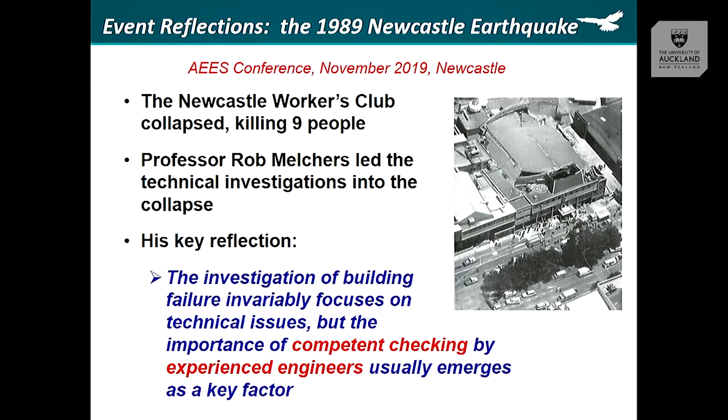2019, where again the design of more than one multi-storey building has been found wanting last year, and some of the issues are actually popping up in other spaces. I wanted to convey a few thoughts on that, without dwelling in any detail on any of those buildings, obviously, but there are some areas of challenge and opportunity I want to run through with you, and we'll phrase them as engineering practice issues in 2020. There's a lot of discussion going on in this space, and I'll just add some thoughts into it.

But the three themes really are all around the designing of ductile structures, and again, what we're seeing is some disconnect between concept and detail.

The common threads from those recent design failures mainly pertain to ductile multi-storey buildings. It's the old chestnut of inter-storey separations either not being provided, with floors being locked up between floors, or the building separation between adjacent buildings where the numbers haven't been done correctly and not enough space is being left.

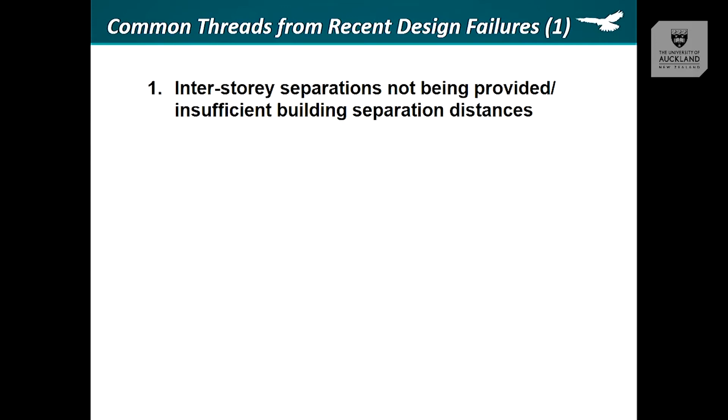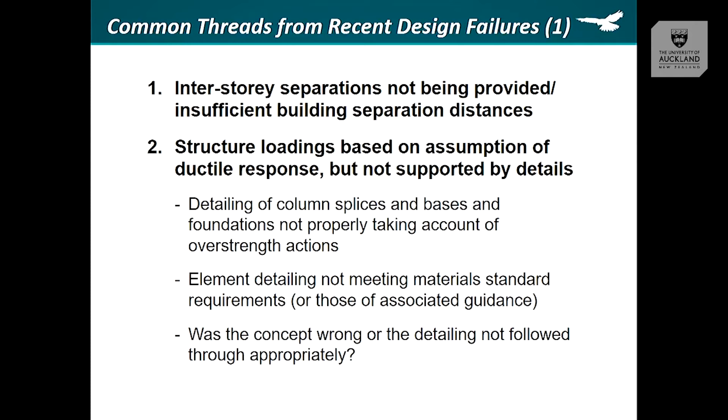The design process starts by assuming a level of ductility to determine the structural loadings, but that's not followed through - the talk is not walked when it comes to the details. That plays out most notably in steel, around column splices and the bases of columns, foundations, not properly taking account of overstrength actions, and the associated element detailing not meeting material standards or relevant guidance. Sometimes the question remains: was the concept wrong, or not sufficiently thought through, or was it the detailing not followed through appropriately?

The third common denominator is that in each of the cases I'm aware of, it was subject to a full PS2 design review. It just didn't spot those shortcomings.

The common consequence of the ones I've been associated with is that the cost to everyone, well beyond the design team, of getting the concept and the detailing - or any combination of those two - wrong, is vast. These were design failures, but they were picked up at various stages of construction, and I think we can all think of one or two in this space.

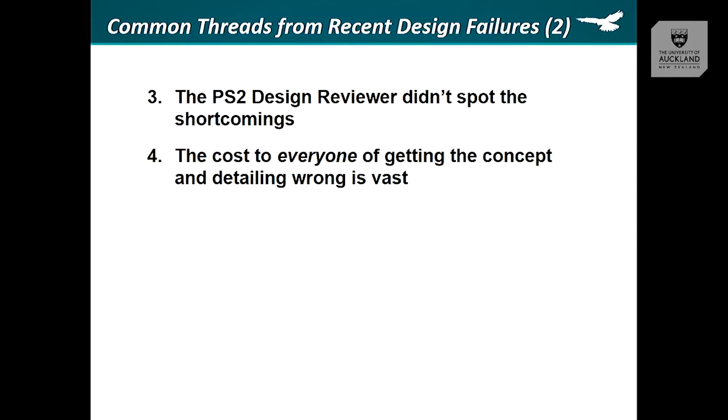Let's jump into the PS2 review process and link that with QA. What we're typically seeing is that PS2 reviews are seen as a compliance element, invariably undertaken upon completion of the design, and they're typically procured on the basis of price. That's a sad bit of reality we're all conscious of.

If that's the process aspect around a PS2 review, then you have the technical aspect - some PS2 reviewers are just not seeing the issues with the load paths or where capacity design requirements are clearly not being met. That's a technical competency issue playing out. Whether that's a consequence of detailed design drawings being so well developed and complex that some PS2 reviewers are not standing far enough back and examining the structure as a raw skeleton, I guess.

So what's the linkage with quality assurance? I was discussing this with Tanya Williams, General Manager of Engineering Leadership at Engineering New Zealand, and she jumped in straight away and said, well, we all know that QA is most effective at the 10% stage - you can debate the number, but QA is most effective at an early stage.

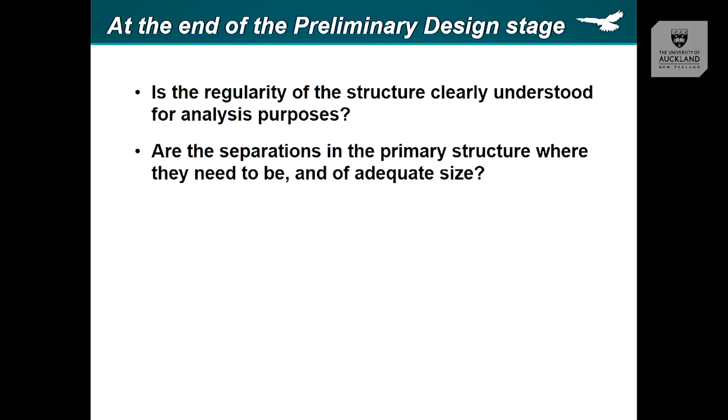As the design develops to the point where the separations in the primary structure are identified, they're where they need to be, and they're appropriately generous proportions, not skimped. Because once you go into the detailed design stage and you haven't got your separations right, it's hard to pull back from that.

Equally, that's the time to ask what are the detailing objectives, what are the detailing requirements, particularly reflecting what's the rationale for deriving the overstrength loads. It varies from material to material and type to type. But the notion is, if you put a box around those three, map those out, state them in a brief version.

It's a requirement in some spaces, such as the Ministry of Education through their various review stages, of the design features report as a preliminary design stage deliverable. I think that could be adopted for any building.

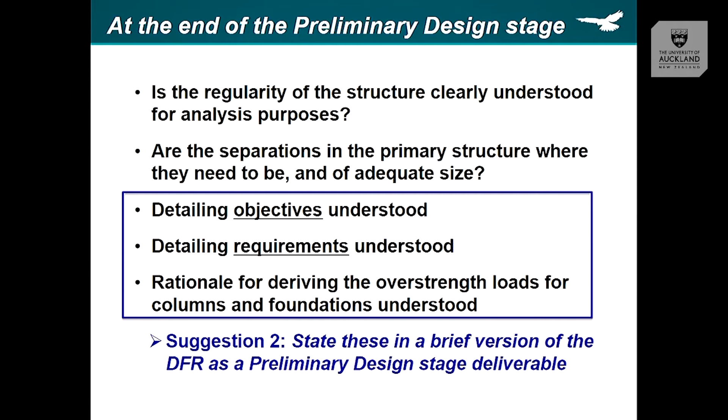So those are the key points I wanted to float, and I just wanted a quick sidebar into seismic assessment, because more buildings are being closed as we speak as a result of low percent NBS ratings. I wanted to share some messaging, really, around making sure engineers are across this, and also try to bring this out in a more public arena, that what does a low percent NBS rating mean, what doesn't it mean?

What it means is, the purpose is to definitely signal heightened risk in the event of earthquake occurrence, and to get the message that some mitigation work is required, sooner rather than later. If the building is then determined to be earthquake prone, there's a formal linkage with defined statutory timeframes, which are not tomorrow - they are, particularly in this neck of the woods, in terms of decades.

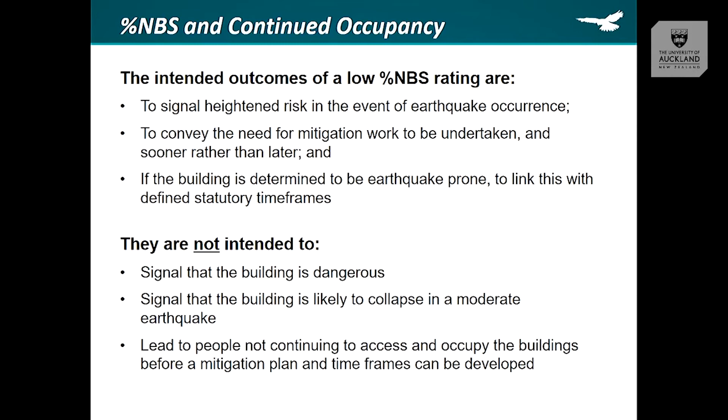They're not intended to signal the building is dangerous. They're not intended to signal the building is likely to collapse in a moderate earthquake. There's still a lot of legacy thinking around that from the previous EPB regime. Most importantly, they're not intended to lead to people not continuing to access and occupy the buildings before a mitigation plan and timeframes can be developed.

And having invoked the notion of decades, if an issue is found with a building such as a precast floor issue, obviously don't wait decades. The owner needs to get on with the mitigation of those items within a year or two. But in the meantime, there's nothing wrong with the building continuing to be occupied.

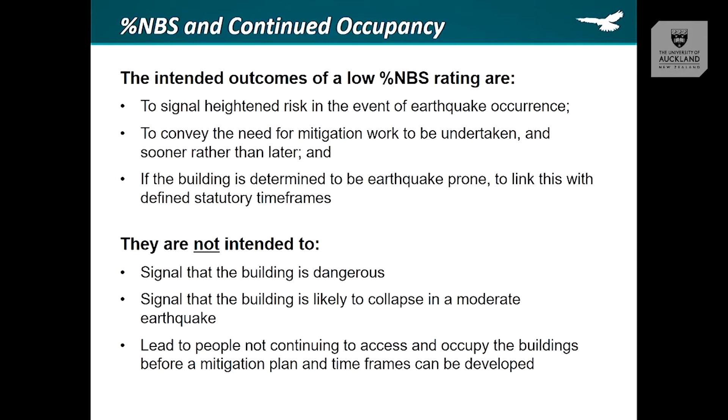We just have to do a better job of conveying this risk concept to people, where they are sadly being driven, we think, by health and safety concerns - let's just say, erroneously.

But just wrapping up, just to reconsolidate the points I'm trying to have a wider discussion on - as we go from the concept or preliminary design level towards detailed design, treat that more as a hold point in project management lingo. It's also a collaboration opportunity.

It's asking the broader question: has anyone else with experience, either from within or outside our practice, had a considered look over our design? Are we clear on the critical design and detailing provisions that must be met in detailed design? And get that early engagement of a PS2 reviewer - it can only be beneficial. They can still have an early engagement and be independent as required from a regulatory perspective.

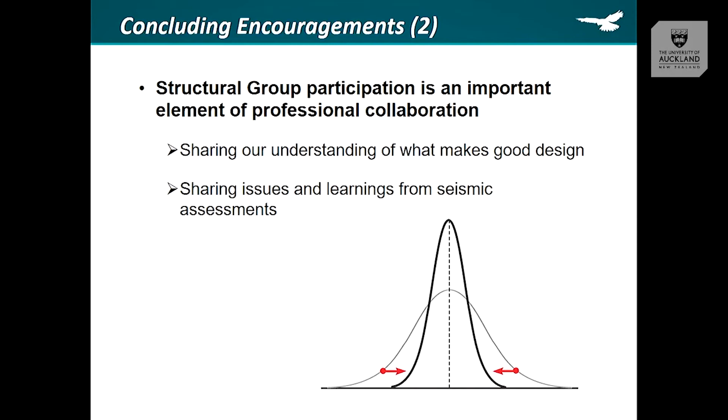Sure, and in Wellington in particular, it's being perceived as a factor in, firstly, whether they will insure, and secondly, how much they'll charge for the cover - and that's our beloved free market, that has to play out. But again, insurance is tough, and it's particularly tough for body corporates and in some of those situations.

It shouldn't cross over into occupancy, but it is being used by sectors that don't appreciate the percent NBS is only a life risk perspective, not a damage perspective - which I think is the point behind your question.

But it goes into the cultural belief that if insurance does not want to cover a building, there must be something wrong with it. Sure, but that doesn't explain why councils that own buildings in some places are closing them upon receipt of a low rating. It doesn't explain why government departments are not occupying them. But it is another factor in the environment.

Are they dead scared about the occupational health, safety and health job? They are, and we've been working with Engineering New Zealand who have spent a good bit of time trying to figure out how we can communicate this better. It's fairly clear that it's the director's risk perspective - the wording in the Health and Safety at Work Act, when it speaks of a risk that can be mitigated with the implication that it should be, a building with a low rating, if you take the director's perspective, you can take the view that we should be mitigating the risk by not occupying the building. We feel there's a disconnect, but it is absolutely in that space.

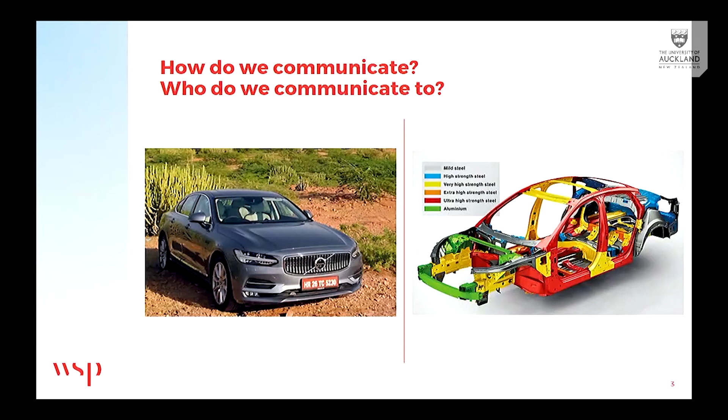So let's just get a little bit real about how we do communicate things. We've made this really bold decision that we want to communicate risk and we want to communicate performance to our clients. So we've got an example here of a car, and we've got quite a cool example here graphically from the car industry. So what do?

We show disasters. We show things falling down. We almost communicate by alarmism. Why can't we stick a fantastic picture up of a great piece of structural engineering and use that to explain performance? Why do we always go back to our failures? Sure, we need to get across to our clients that we are designing for life safety, and there will become a point where perhaps collapse is more than a real probability, it's highly likely. But why do we go straight to henny penny and Chicken Licken and the sky's falling in?

So that was my sort of view of how we might communicate performance to our clients. Let's showcase something seriously cool.

So still on the communication theme, having decided that we do actually want to come out of our shells and communicate to our clients, how do we go about doing it?

We've got all these media. So what we choose to do is we choose to talk about TWAs. So I'm going to tell you a story about TWAs, and this story goes back sort of 20 or so years, well, actually more years than I care to admit, when I was at university. My professor walked in and said, today we're going to talk about TWAs. It's like, great. He got about 15 minutes into this lecture about TWAs, and someone stuck their hand up and said, excuse me, what's a TWA? They got a duster thrown at them, because you could back then. I'm glad you bloody asked. A TWA is a 3-word acronym. Now don't ever sit there like a stunned mullet and not ask a question again.

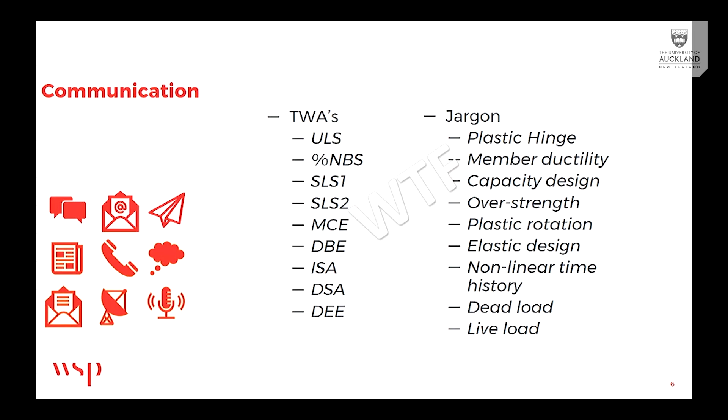So I know this is recorded, I thought very hard about this. I put my own 3-word acronym up. But at the end of the day, we might as well just be talking alphabet soup to people. I'm trying to make light of all this, but this is a serious issue.

How many of our reports are littered with this stuff? You know, those people that do a design features report, thank you. Everyone should be, but thank you for doing it if you are. But when we talk about some of this stuff, how are we actually conveying the message to our clients and knowing that they understand it? How are we conveying this message to other disciplines and getting them to understand it?

So I'll get off my high horse on communication momentarily.

Hands up who's never made a mistake. Great, I thought someone might stick their hand up. So we've accepted mistakes happen. Do we think they happen in our designs? Hell yes. So if we accept that we all make mistakes, and I'd be surprised if that's not a true statement, I've borrowed this first bullet point off somebody.

Is it something that could be a tolerable imperfection, or is it an intolerable error? We've got all these factors in our designs. Is it going to bring the building down? Or is it something going, you probably should have done better, but, you know, think we've got a safety factor, we'll get away with it this time. So how do we think about tolerable versus intolerable?

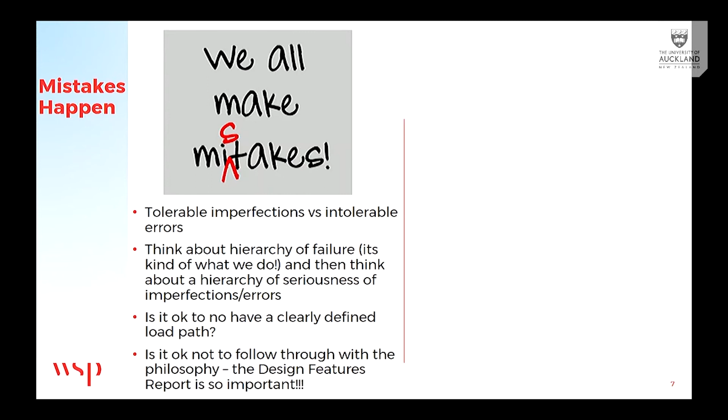Is it okay not to follow through with the design philosophy? Dave's touched on this before. So you've gone to ductility 6, woohoo, because then your SLS 1 is all sweet and everything's pruned to the bone, but you haven't detailed for ductility at all. These things are fairly basic.

It's really, really important, and that's why that design features report that Dave alluded to is so incredibly important. So we've made a mistake. We can learn from it. What do we do? Do we fix it? Do we ignore it? Do we try and justify it with a non-linear time history? Do we defend our answer to the hilt? Or do we act professionally?

I've made some monumental mistakes in my career, and those that I have fallen on my sword over and gone back and fixed, the client might have been grumpy at the time, but that's been a client for life, and they have thanked me for doing it.

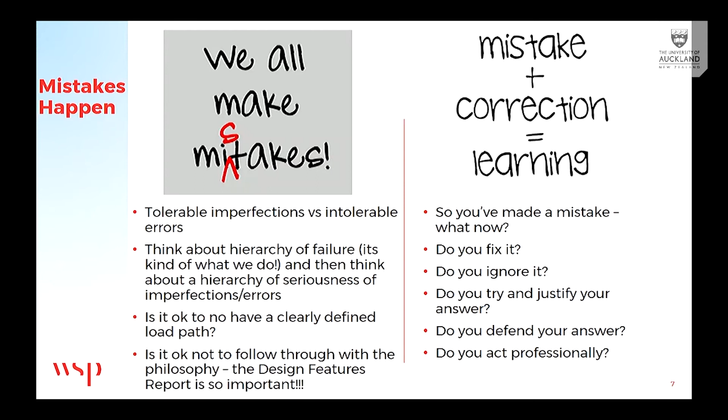How we act is so important. So I'll get on to another little hobby horse of mine: professionalism.

Words like respect, integrity, ethics, honesty, they might spring to mind when we talk about professionalism. They're important words, really important words. I've got a quote here from a David Maister, he's a doctorate at one of the Harvard business schools or something like that.

Professional is not a label you give yourself. It is a description you hope others will apply to you. Have a think about that.

We hold ourselves up as professional engineers. It might be slightly arrogant to say that we are professional and we are honest and got integrity and all the rest of it. We earn that by our behaviours.

So just to cut the quotes out of a dictionary, professional is about conduct, it's character, it's behaviours. And I also like the one when they talk about a profession being a calling that requires specialist knowledge and academic preparation. That's what we do.

So, that gets me on to my next one. Who sets the risk? We had a discussion before about MBS. How many reports have you seen recommending somebody evacuate a building? If you write those reports, please don't. It is not up to us to accept the risk.

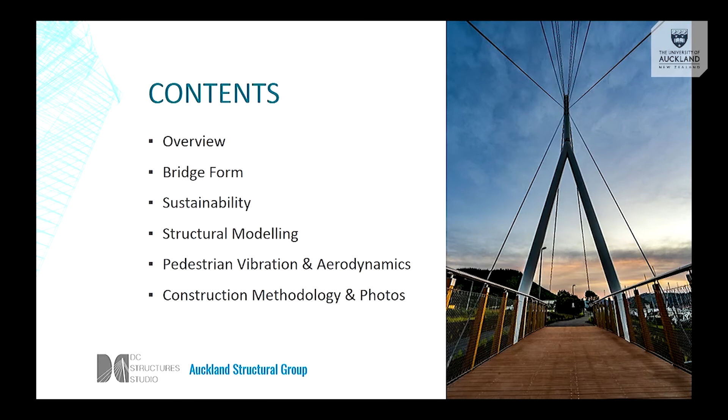Obviously each one of those in themselves is an hour lecture. And then I've got some cool photos at the back that show you start to finish how to build a bridge. So we may zip through some of the core content.

So the Water of Leith Bridge is down in Dunedin, right on the waterfront. If you know Dunedin, you'll know the Forsyth Barr Stadium, or the Otago Stadium — it's right next to that. So it's a coastal environment.

The client was Dunedin City Council. Being a cycleway asset, it was also jointly funded by NZTA. Constructor for the project was Edifice Contracts. Geotech was Geosolve, and DC Structures Studio — we were the bridge architects and bridge engineers. The overall project was a design and construct led by Edifice Contracts.

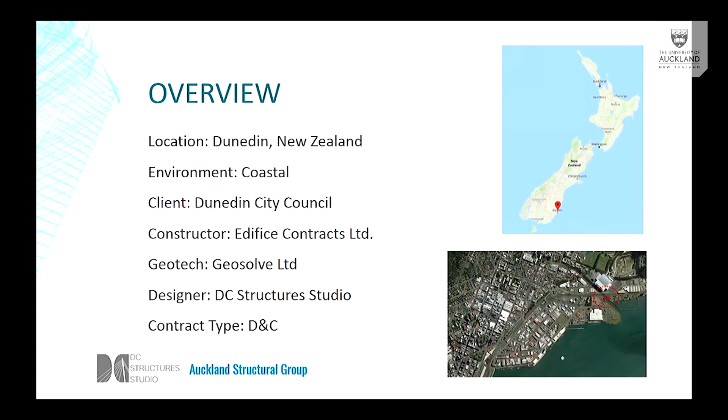So when we came in, the existing design was for a very industrial, mechanical looking truss. It was purely a functional asset. When we were brought in, our goal was to come up with an alternative that would be cost effective. So we developed a cable stay concept, primarily looking at a lightweight structure that was cost effective.

Now obviously this is well beyond what Council had originally envisaged. They were looking purely at an industrial structure down by the waterfront for access. As soon as they saw what we could provide them, discussions turned to further embellishments — architectural lighting was added, we embellished the balustrades, and they got a much higher end product than what they originally set out to do. Again, because we actually massively undercut the budget, which they thought was okay.

But by coming up with the right structural form and being very clever with our material choices, we were able to open the doorway to looking at more of a landmark. So it's a 45 metre by 3.5 metre cable stay cycle bridge, designed to the NZTA Bridge Manual version 3, 5 kPa live load.

The mast is a 22 metre high, what we call inverted Y — so if you imagine a capital Y, it's just upside down with the bridge passing through the legs. That's formed from steel hollow circular sections, all butt welded, so it's a very seamless architectural element in its own right.

We've got 12 sets of strands for the main span and 6 on the back span — they're high-strength spiral strand cable. Being a coastal environment, they've got a Galfan coating, which is 95% zinc and 5% aluminium, just to give it that extra level of durability.

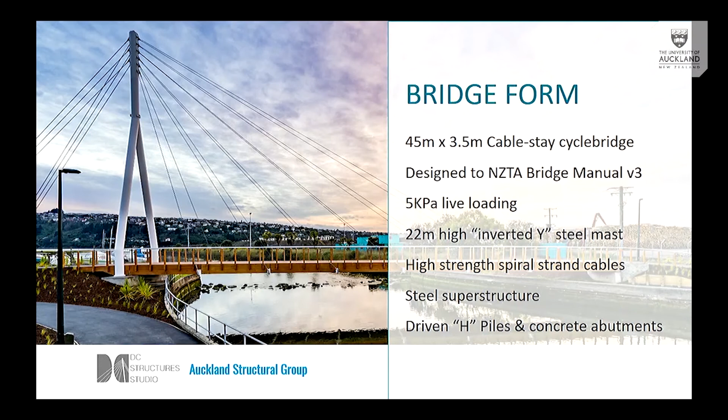That's probably enough on that. Now I want to cover sustainability. I often get asked, how can we as engineers influence sustainability? We've got a bit of responsibility to our clients for coming up with section sizes and materials, and it's in our material choices that we can really make a difference.

So in terms of making this competitive, it was about lightweight structure. Traditionally, a cycle bridge would have either a concrete deck, possibly a steel plate deck with an epoxy coating, or even timber decking. What we've gone with here is actually a product that's 93% recycled—a mixture of recycled bamboo and almost 50% recycled plastic.

I don't know if anyone's been tracking the latest news on plastic. There's a TV program on at the moment called War on Plastic. Plastic is a big issue at the moment—we're chucking away plastic bottles left, right and centre, and it's just being left for 100 years. So trying to get those materials uses beyond their normal life is quite important. We've got a product here that we use, which was 93% recycled.

We teamed that up with glue laminated timber, which again is FSC, Forest Stewardship Council certified. Ultimately, what that says is this is a sustainable material. Both of those materials combined created a lightweight element that meant the steel, the cables, everything was working less hard, which led to the economic driver, which led to a happy client. So all of those things combined well together.

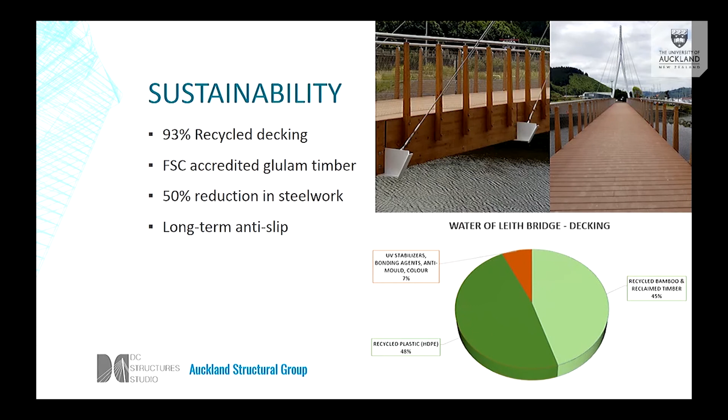We believe, compared to the specimen design, we cut about 50% of the steel out of this bridge. The specimen design was a steel truss with a steel deck and epoxy topping—that was around 50 tons. This structure, with the superstructure and the mast, came in at about 25 tons. So if you're going to take anything away from today, it's think about how your material choices can influence the environment and step beyond just the technical aspects, and think long term.

Okay, let's get into the nitty gritty of the structural stuff. The structure was modeled in SAP 2000—at the time we were running version 20. I know we're pressed for time, so I'll just leave that table up there; you can always come back to this.

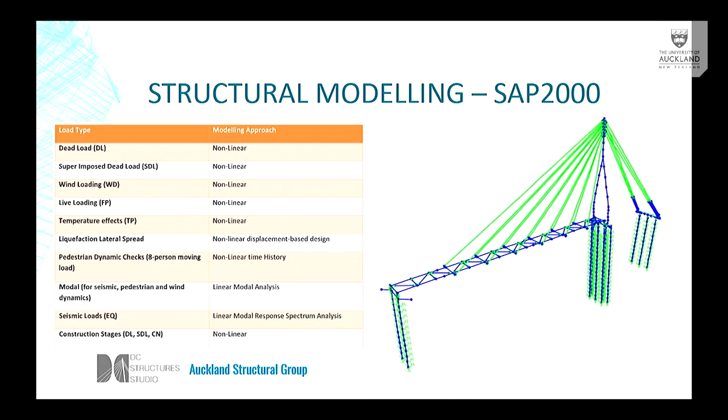Essentially, everything was run non-linear. The cables were all designed as catenary cable elements in SAP, and all the steel and concrete was designed and modeled as beam elements, and we had a variety of different spring types to model variation in the soil.

Now, pedestrian dynamics is cool, but it's a big subject and we could be here all night talking about it, so I'm just going to cover it very broadly and give you some of the inputs. If you ever come to design a structure similar, this just gives you a starting point to work from, and you can come back to these slides.

So essentially, we're designing this bridge to Eurocode 1, the UK annex, which gives real good guidance on pedestrian dynamics. The first thing you do is identify the bridge class. This particular bridge, being close to a stadium, was classified as type C, which is an urban route. The difference in your classes just defines the amount of pedestrian density you can expect.

Once you define the class, it gives you two types of things: one is a walking group, one is a running group. It also defines a limitation on the acceleration you should expect. In this case, we were limited to 1.3 metres per second squared. We had to model to prove that those excitations didn't exceed that.

The reason you do that is because that acceleration represents a comfort level to a pedestrian or user group. I was going to put a model up there showing how we modeled the pedestrians, but fundamentally we tracked a load. It was a sine wave load.

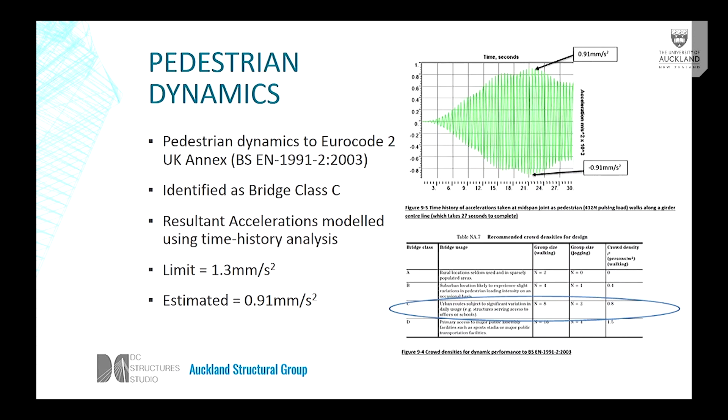I can't really cover much more than that at this stage, but at least that gives you a bit of a segue into that kind of design technique. Wind dynamics, again, because this is a long span cable structure, wind dynamics and pedestrian dynamics are all very important elements.

We designed the wind on this one to BD49, and the cables were designed to the Post-Tensioning Institute's cable stay recommendations for cable oscillation. Fundamentally, BD49 looks at your natural periods of vibration, mainly in the vertical plane, lateral plane, and the torsion. So the one I've got there is just the torsion behavior of this particular bridge.

When I was looking at the torsion, we found that we were getting some anomalies. What became apparent pretty quickly is it was very important how we modeled our cross beams. We've got very deep cross beams, and that wasn't being shown in our modelling.

So in this instance, we've replicated the deep beam as a truss so that we can get all that torsion through those members. We also did it with rigid links as well to prove similar kind of behaviour.

The key with that is just making sure your model makes sense. Looking at periods of vibration is always a good check. If you really want to test a model, turn on your modes, and if nodes are flying off in the distance, it means they're not connected - it means they're wrong. So it's always a good litmus test for any bridge, as we've talked quite a lot today about making sure you understand what you're saying.

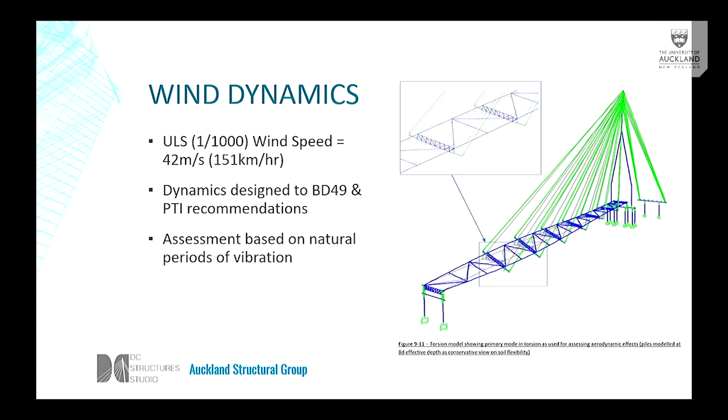Checking vertical reactions is a given - you have to be doing that by hand. But checking mode shapes is also quite important. I won't dwell on this slide too much. Really, if you get to a structure similar to this, this data will give you a starting point.

As an example, BD49 is split into 3 main sections. The first section is: do you have a structure that you can use BD49 on? If not, you're sent to do wind tunnel testing - that's expensive and timely, and your client's not going to appreciate it too much. So if you can get your initial calculations right in section 1 and get your structure compliant with BD49, you're in a good position.

Section 2 is some real high-level checks. If you comply with those, you're all good to go. But if you don't comply, then you're into section 3, which is a little bit more complex. I've highlighted one of them orange, which is vortex excitation. This was in the vertical plane - it's about how much bounce you get with the wind coming through.

Now, we failed our section 2 check - not an issue, it just means we need to do more calculations. So that led us on to section 3.1, which looks at, okay, so you're getting excitation, but again it puts it back to a comfort level for your pedestrians. For this one, we found that at almost 50 kilometre per hour winds, we'd get what was classified as unpleasant performance.

Now, for a lightweight economic structure, we thought, well, that sounds reasonable. If you're out riding your bike across bridges in 50 kilometre per hour winds, you're expecting an unpleasant ride. So, that's about the sanity behind what the numbers are telling you.

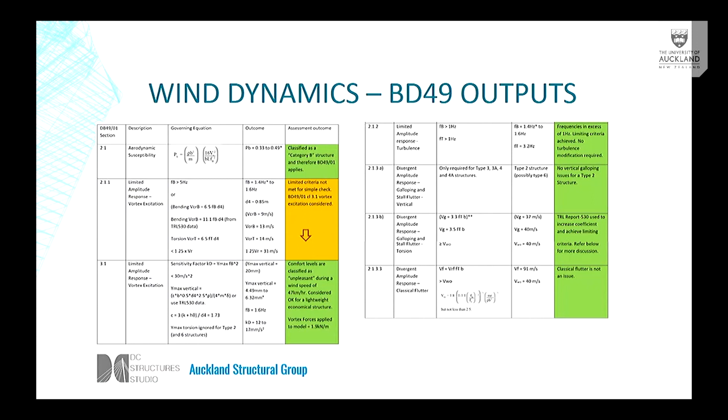So there's probably minutes somewhere where they've said, yeah, that sounds good, Dan, thanks very much. So I won't dwell on it, but these numbers tell you some of the output numbers we received. So if you're doing a similar structure, this will give you a scale or a starting point that at least you can compare. That's one of the hardest things to find in this realm of dynamics - that starting point. What have other people done? There's a lot of literature on it, but no actual direct examples.

Okay, so we're doing all right for time. So the next lot is just a load of slides from construction all the way through to completion.

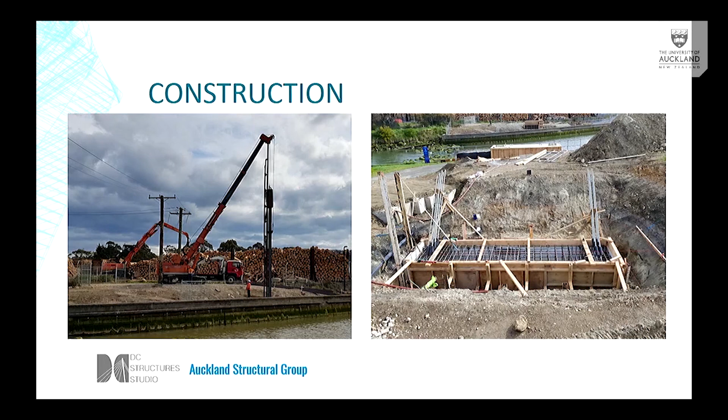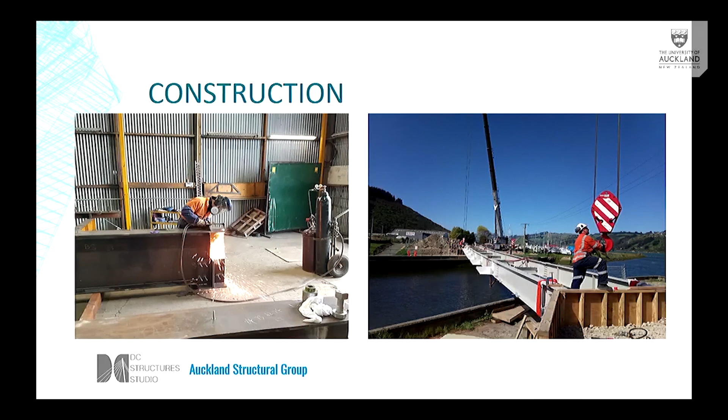Here we go. So this is, again, HML fabricators down in Blenheim, fabricating the mast there. It's a beautiful looking thing, and seeing it in the yard, they were all really pleased with it. This image on the right shows the pure steel skeletons - this is before any balustrades and timber plastic decking has gone on and any cables are in place.

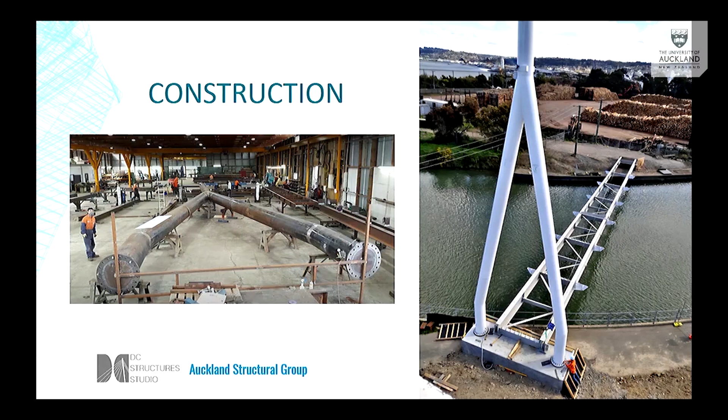So what we tried to do there is obviously we need load transfer from the decking into the cross beams, but you don't want your decking running all the way between cross beams - the span's too great. So we've used a timber joist type methodology. Now on the sides, we've kind of exaggerated the joist depth a little bit so that we get that architectural appeal. So the outside beams are obviously deeper than they really need to be to act as pure joists, but that's a decision you need to make sometimes - treat engineering as a craft rather than just a number crunching exercise.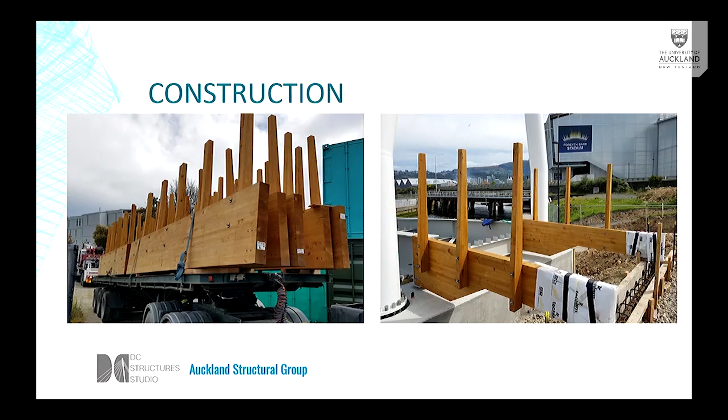Obviously, you can see there they're arriving on the truck. The balustrades were pre-installed, again, just to reduce safety at height issues and things like that. And they're beautiful pieces of kit - these are glue laminated beams fabricated in Napier by Techlam, with stainless steel fittings, really, really good looking elements. Now here's the cables going on.

Like I said earlier, two sets went onto the main span before the timber and decking went on, and also a back span set. What that did is it meant we didn't need to design the superstructure with any pre-camber. We let it sag, then put the cables on to lift it back up, take some of that weight, and then it was ready to receive more dead load.

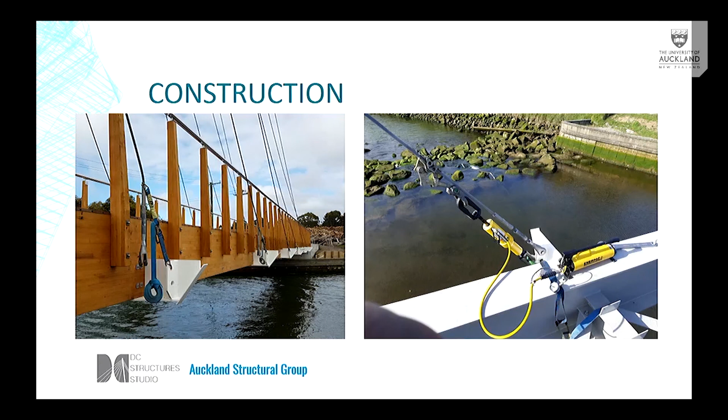You can see here we've preferred cables rather than rods. Rods are quite widely used, but we've gone with cables, and we've been able to use cable clamps there with a ram assembly. On those outrigger cross beams, we've got an extra hole, so there's always somewhere for the ram to connect. Those clamps are designed for 15 tons, and typically we're pre-stressing to about 10 tons. It's a pretty mobile, easy to use kit, so that worked really well.

Then it came to the finishing, so we've got beautiful approach handrails. You can see what that is - a very economic but still nice looking balustrade. We've got a timber glue laminated post, a stainless steel top rail, and stainless steel mesh infill. What we found is the timber with the stainless steel, they kind of showcase each other. When you match the timber with the stainless steel, they really bring out the best in each other.

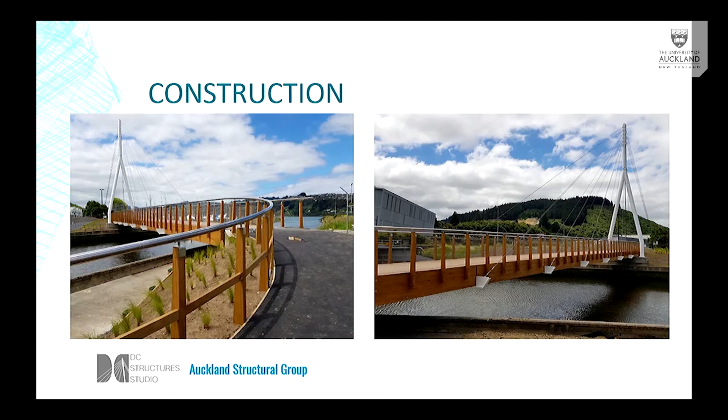So there we go. There's a whirlwind tour on how to design and build a cable stayed bridge.

How much? That bridge cost 1.4 million. Originally it tendered at 1.2, but we added extra architectural lighting and there was an increase in the balustrade. But ultimately it came in at 1.4, and that's with design and geotech included - that was a design and construct price, 1.4 million. So I'm not sure if the contractor would want to do it again for that price.

But it was a very good outcome. The contractor did come away happy, and the client came away happy. The design team did too - everyone came away happy. I think for any project to be a success, you have to have every party come away having it been a success, otherwise it's not really a success. It's no good if the client's upset or the contractor's upset. It needs to be a success for everyone, and this was a good example of that.

So yeah, any other questions?

For a structure like this, would you generate some sort of maintenance program to ensure you're going to reach your targets of lifespan and all that? Is there one in place and is it being implemented? Yes, and actually there was a big emphasis on this because it's a marine environment. We've actually got the maintenance plan on the cover drawing, so there's a schedule table. We've kept it as simple as possible so it can be used, but it literally talks about key items.

So for instance, the cables - they had around about a 50-year life. The table is very clear, it says cables, 50-year life, refer to drawing XYZ, and on that drawing they talk in a lot more detail about the cables. There's a similar one for the timber - the glue laminated timber has a 50-year life, but the overall structure has a 100-year life. And same with the paint systems - these were 40-year paint systems.